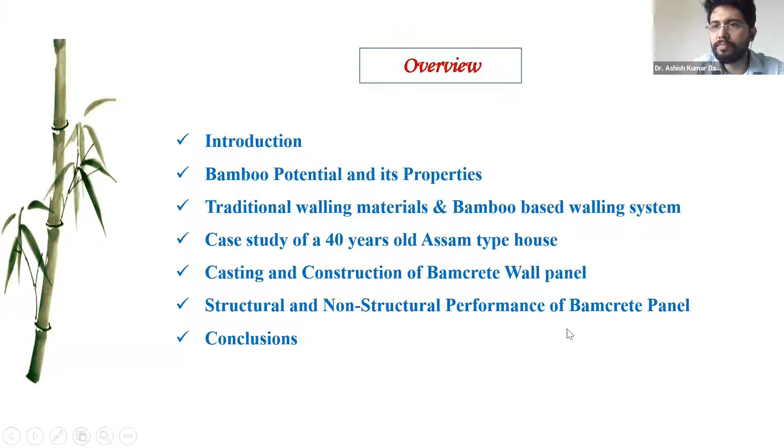So, the background of the work, I'll explain. The cement plaster bamboo-based wall is very common in Assam and various northeastern parts of India. However, this technology is rapidly getting obsolete. This research was initiated to establish scientific knowledge that can help in the acceptance of this technology.

As construction is one of the predominant sectors in developing countries like India, after agriculture, the wall takes up one of the important construction units and consumes a huge amount of raw materials. If I'll say the walling materials so far that we are using - burnt clay bricks, fly ash bricks, hollow concrete blocks, autoclave blocks - and many more lightweight drywall partition systems have come up.

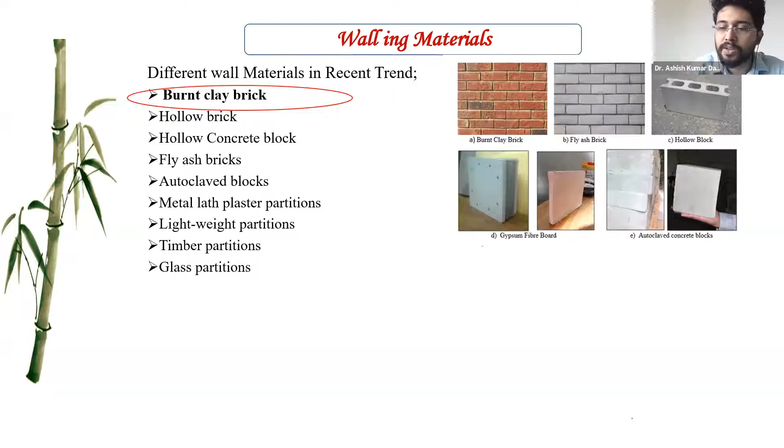But all these walling materials usually consume non-renewable resources. So out of different walling materials, still burnt clay brick is predominant and dominating over others, even though we know that burnt clay brick has different disadvantages. So we have to look into some sustainable alternatives, and in this prospect, we cannot keep aside bamboo.

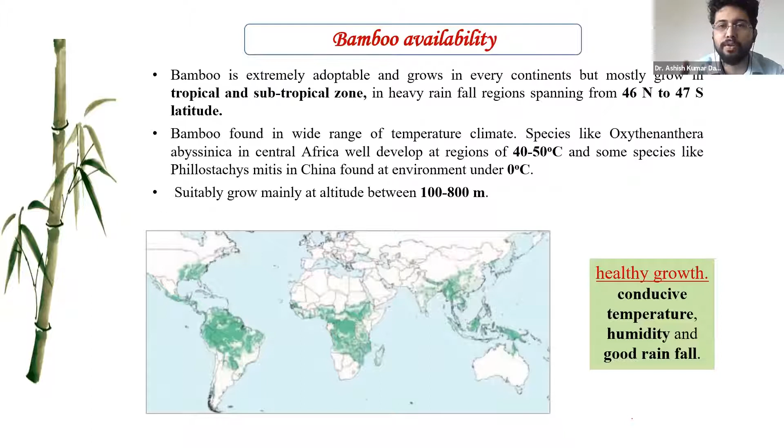As we know, it's a fast growing giant wood-like grass, coming in the family Gramineae. The availability of bamboo is widely available all across the globe, especially in the higher rainfall areas in tropical and subtropical zones. Even different bamboo species are available in very high temperature areas at 40 to 50 degrees, or even some species are found in very low temperature climatic conditions.

As for bamboo distribution, it is quite abundantly available - about 67% in Asia and Oceania, about 30% in the Americas, and the rest in Africa. Europe does not have any indigenous species, unfortunately.

So, bamboo distribution across India - about 12.8% of the country's forest area is covered with bamboo. About 66% of the growing stock is concentrated in the northeastern part of our country, and Mizoram is covered with about 57% of its total geographical area.

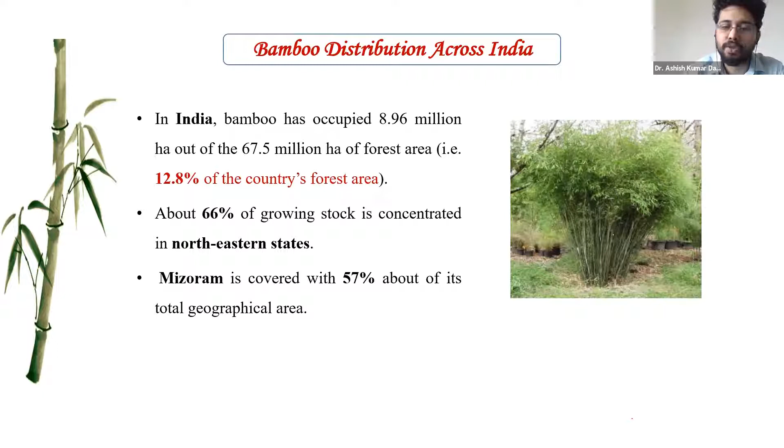If we'll see the features, bamboo is a culm segmented with solid joints called nodes. Between the nodes, the culm is called internode, and this culm wall thickness greatly influences bamboo's mechanical properties. It is very good in compressive test - we have found the value is even more than normal concrete, about the level of structural concrete - and also good in tensile and flexure.

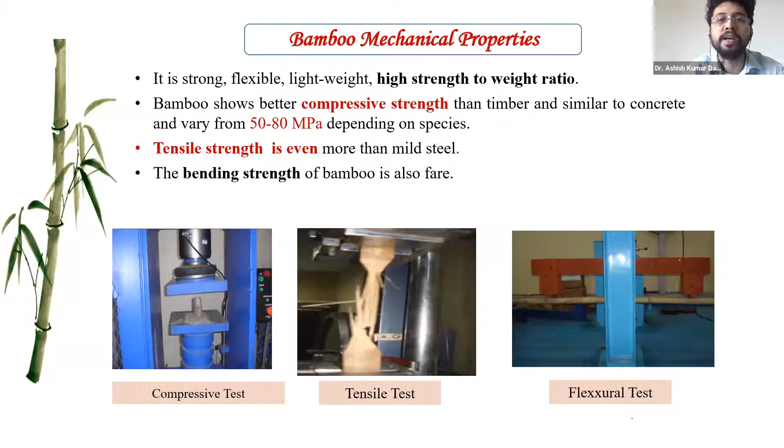Bamboo usage, especially in walling systems, has a recorded history since a long time. As per 2012 data, about 9% of the population live in grass, thatch, and bamboo walled houses in India, and about 65% in Arunachal and Assam live in bamboo walled houses.

Bamboo as a wall construction material is used all across the world because of its special properties like lower modulus of elasticity, good ductility, and pliability, hollow and lightweight, which makes it easy to form into strips for weaving purposes.

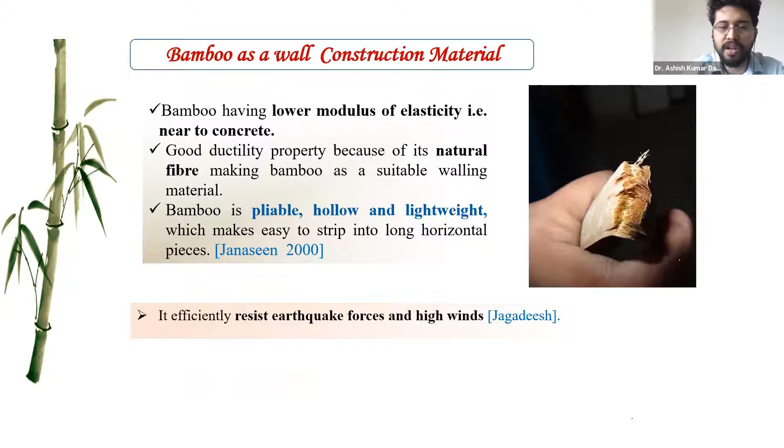If we'll see the bamboo-based walling system, it is broadly classified as permeable and semi-permeable. Technically, it's classified as plaster form and non-plaster form. Coming to the first, non-plaster form - there are different kinds of non-plaster bamboo systems and weaving patterns that have been developed traditionally.

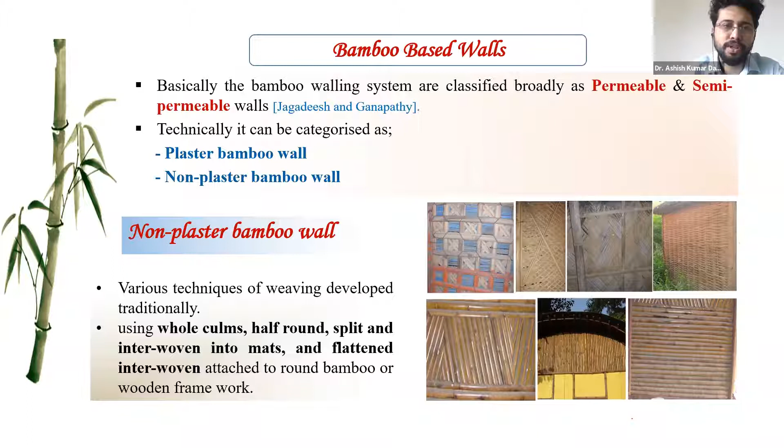So here it is one bamboo board which is used for the wall, and this is the chitra wall, which is mostly used in many parts of the world. The texture and everything depends on the skill of the artisan. And the prefabricated bamboo mat, which is the developed one - these are the prefabricated bamboo boards and composite mats.

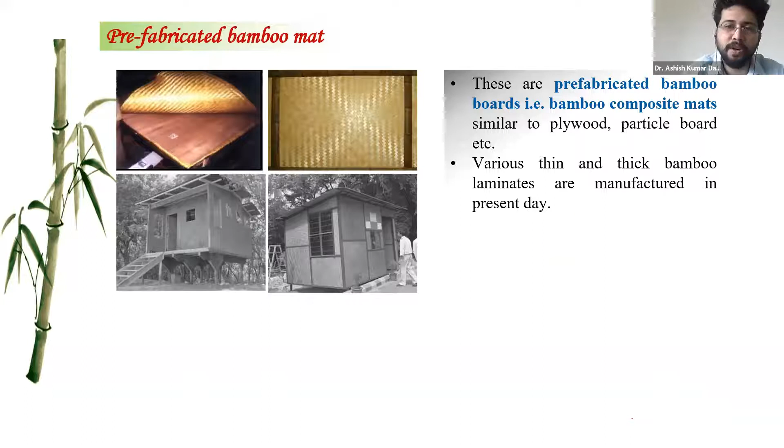Similar to plywood or particle board, these are mostly used, but it has been seen that unless it is protected by a long overhanging roof, away from ground contact, or painted regularly, this unplastered bamboo walling system deteriorates rapidly due to direct sunlight, weathering, and fungi or insect attack. In contrary to that, the plaster form of bamboo, which is an improved version of the bamboo walling system, makes the bamboo system better in strength and robustness, also providing insulation and protection against fire and weather.

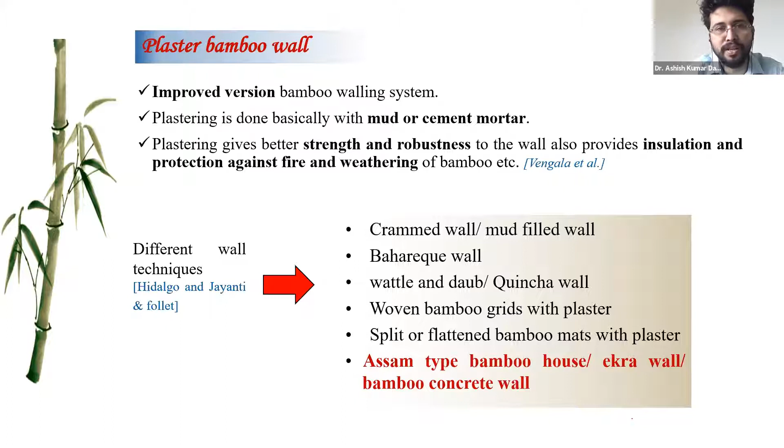So these are the different types - everybody should be aware of this plastering form of bamboo walling system, in the crammed wall system, which is practiced across the world in different ways. This is the mud filled system where the studs are placed and slats are attached, and the space is filled with clay.

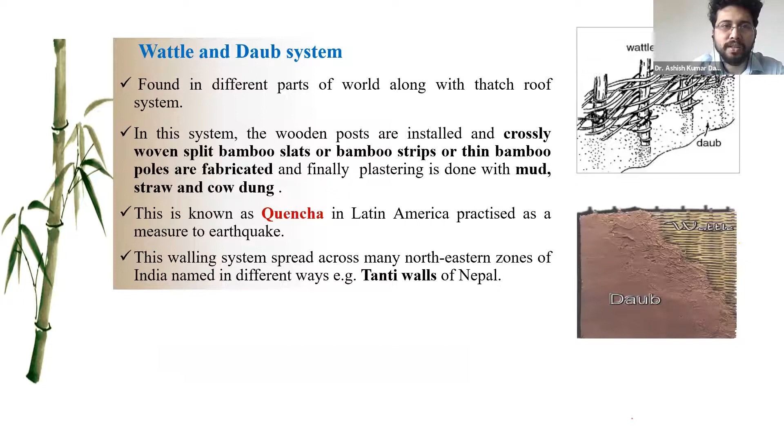This is the translation of the Bahareque system that we usually know. Then the wattle and daub system - this is the woven bamboo system, also known as quincha in Latin America. Then the bamboo grid system, derived from the Tanti wall, where steel wire mesh is covered and plastered using cement mortar.

So out of this, this is the developed form of the bamboo walling system in the plaster form, that's widely adopted in many northeastern parts of India.

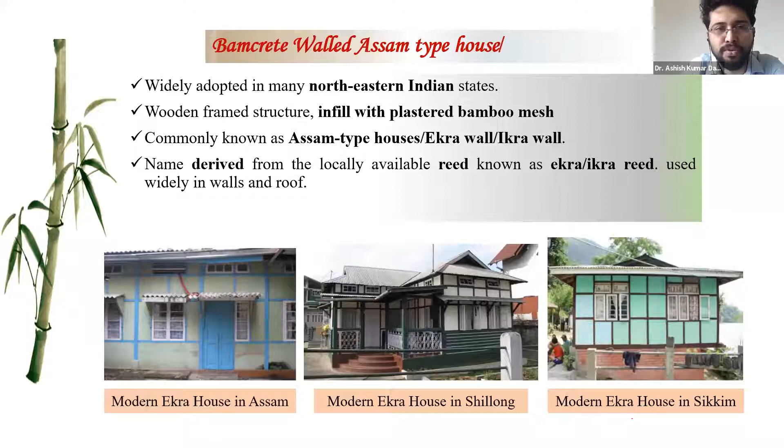This is the bamboo wall in the Assam type house, commonly known as Assam type house, and this walling system is known as Ekra wall, because it is Ekra reed which has been used for the construction of the walls and roofs. And from that, this name has come.

Usually in this building, the bottom part is a brick wall and the top part, above the window sill level, is constructed of the bamboo walling system. The development of this Ekra walling system - previously it was a wattle and daub system - this mud is replaced with cement plaster during the British colonial time.

This system is known as bamboo concrete, where the concrete layer from both sides is interconnected through the gaps of the woven bamboo strips. And this system has been practiced widely across the community, among different economical groups of people over time.

But unfortunately, this is in a phase of obsolescence, as modern construction is not paying attention to this. So for reviving this technology in a better and modern way, we started work on this, and a case study of an Assam house, a 40-year-old Assam house, was done.

This was a 40-year-old Assam house, which was dismantled in 2014. It was built in 1973. This is the supervisor's own house - he spent his childhood days there.

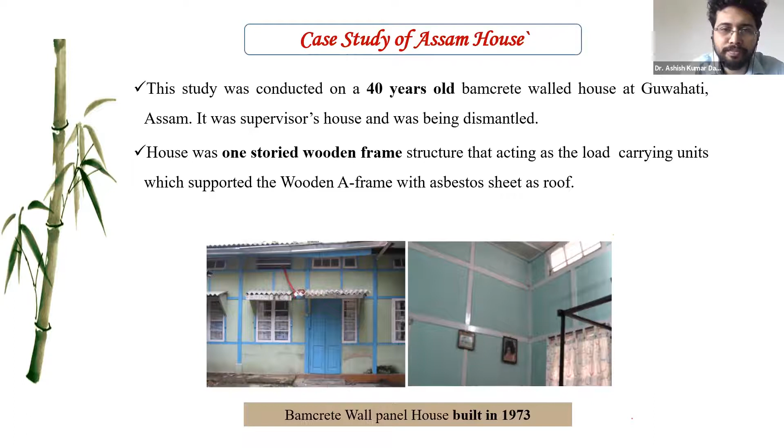As we note, in this kind of traditional system there is no concealed wiring, which is one of the flaws. Another flaw is the hanging of roofs, pictures, curtains, and everything - usually it is practiced from the battens. These wooden battens are the main load carrying member, and these partition infills are the bamboo walling system.

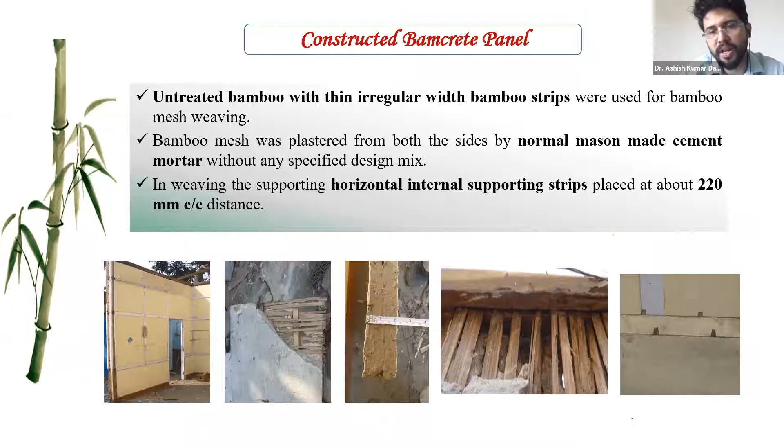So in this wall, I found that untreated bamboo with thin, irregular width bamboo strips were used. The mortar that was laid was the normal mason mortar, without adopting any design mix. The mortar used in the construction and casting of the bamboo system is the normal mason mortar.

As per the house owner, regarding durability, it has been understood that these panels had undergone no damage or any repair work in their lifetime of 40 years. There are no cracks or anything visible - only regularly it was painted, even though we know that Guwahati is in earthquake zone 5.

Even a devastating fire broke out in 1992 and burned down the colony, within 10 to 20 meters distance, completely - but nothing happened to this house. So we started different experimental scientific validation of this, as we know that a partition wall member suffers from different kinds of loading during its service and needs to satisfy different performance criteria, especially structural and non-structural both.

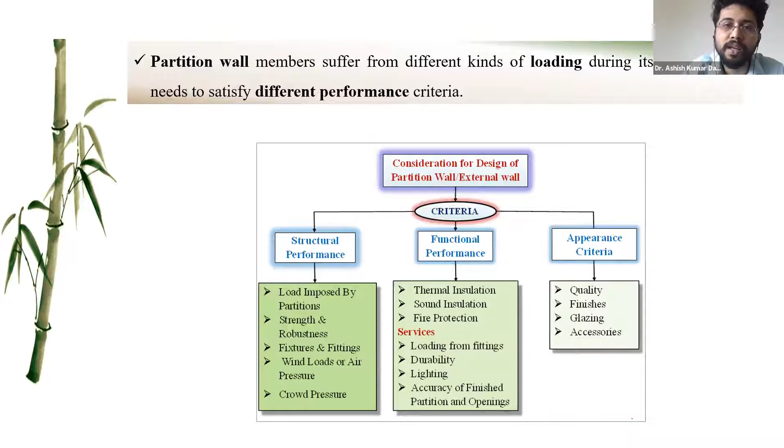So the impact test and the monotonic loading test, the static loading test usually, which we consider for the energy absorption capacity of this bamboo walling system. So both the vertical and horizontal impact testing with the hard body impact test. And we conducted the test on the existing 40 years old bamboo walled panels.

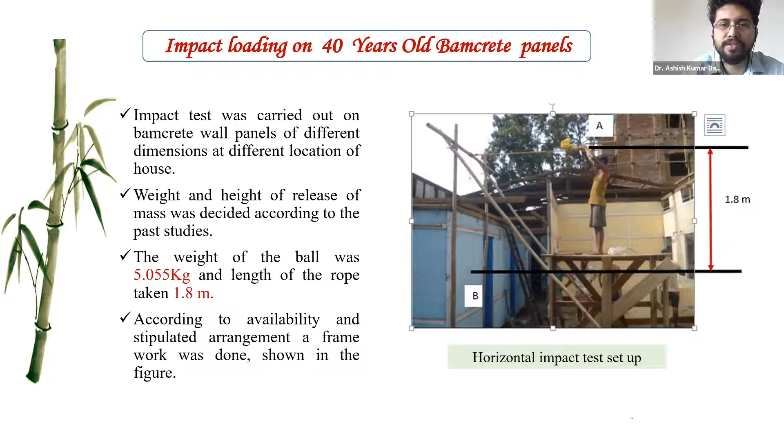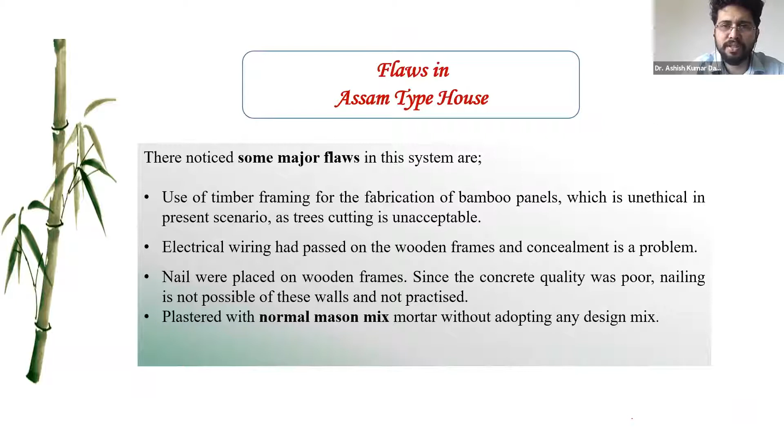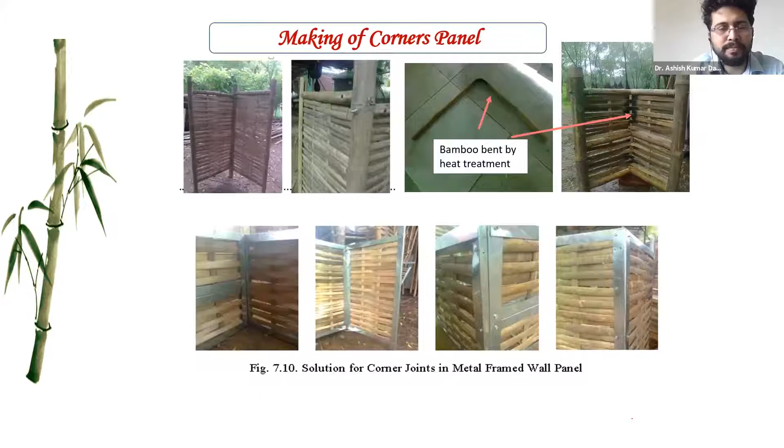After this test, we started work at the laboratory level in the preparation of the panels, both small and large size panels, where bamboo as a frame we first used, then the metallic framing with the twin leaf and the single leaf system, we started fabrication. After that, the techniques of making the corner panel. Then the casting work started. This casting was of different types. Firstly, we considered the normal mason mix casting.

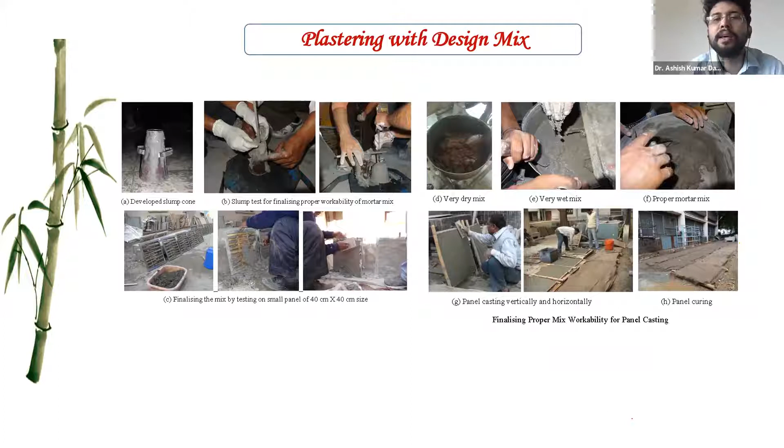Then the casting of the panels with the design mix of mortar. Using the design mix of mortar, we studied the rheology effect, and the casting process has also been undertaken in the casting of the bamboo panel. So the workability level, the admixture doses, and this work is now carrying forward everything, the viscosity and this. So these are the different water cement ratios we considered, from 0.4 up to 0.7, and casting of the panels was conducted. In the process of casting, besides manual casting, now we consider the machine-based plastering process.

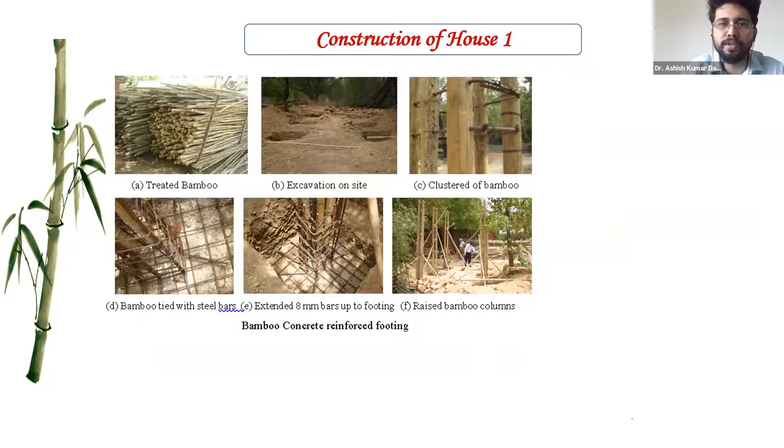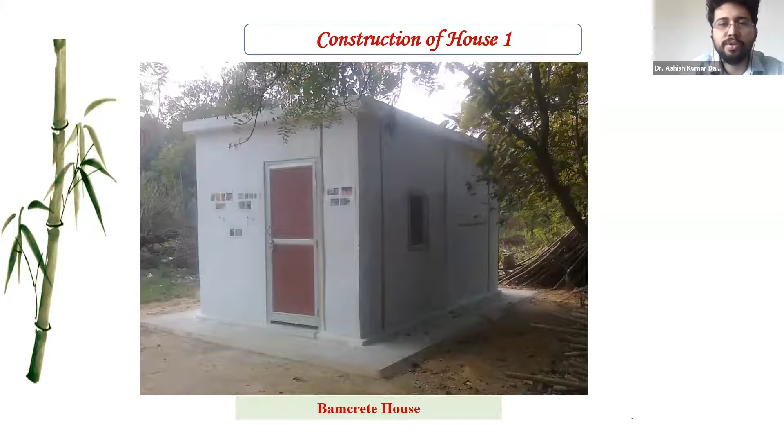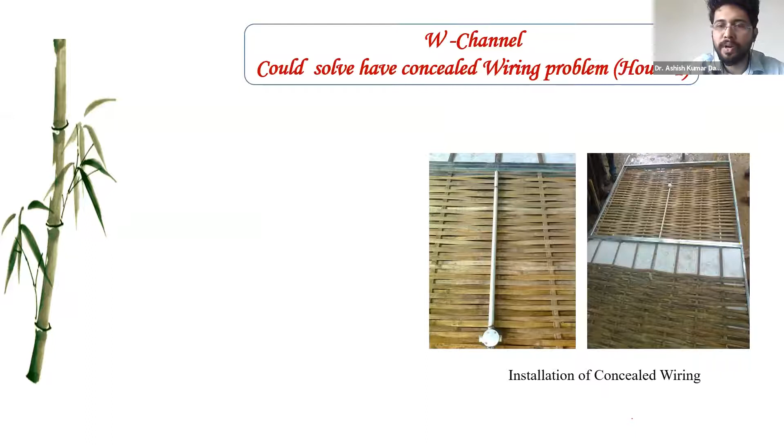So in the twin leaf system, we solved the problem of concealed electric wiring, which is quite difficult in the case of the normal traditional Assam type house. So to take this technology forward, we used this twin leaf system with the wiring passing through it. And this is the house that I have already shown. And also nail insertion, which is a problem in the case of normal mortar mix. But the design mix mortar has enough strength to carry the nail insertion, and we studied everything. Then predetermined insertion of the plate in the W channel we also studied for anchorage purposes.

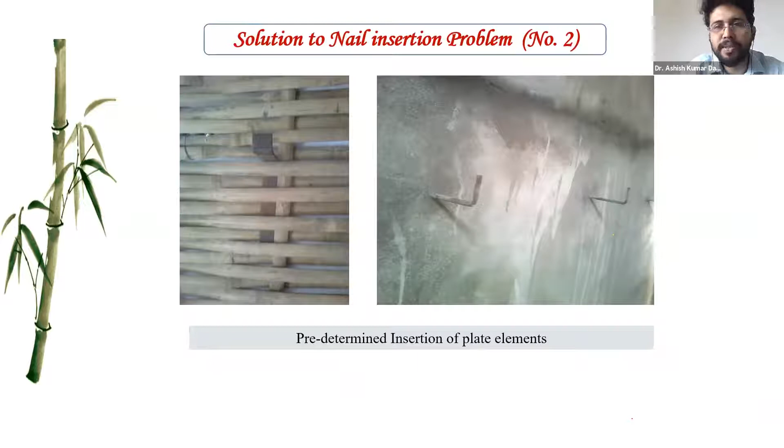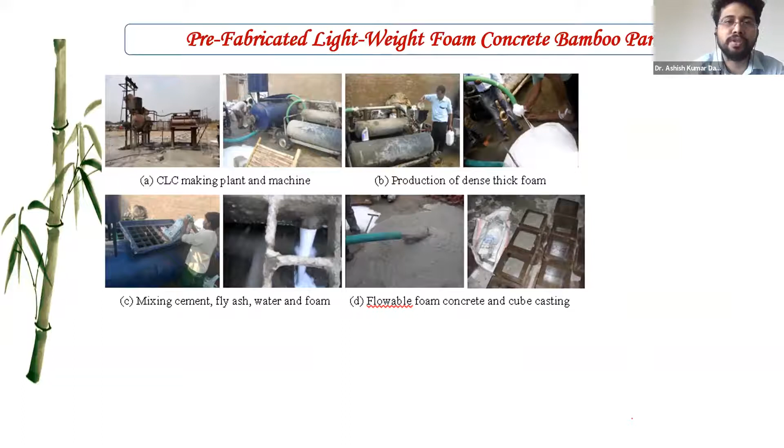Then different parametric studies in the fabrication process, with the number of vertical supporting strips, with non-skinned and skinned strip weaving. Then the effect of the width of the strips on the panel strength. These are the different parametric studies, also using different materials such as flowable foam concrete, which we used to make the panel lighter. It has also been studied. And you can see in this picture, both single and twin mesh panels were cast using the flowable lightweight concrete. Other materials we also cast to study other material systems with the bamboo walling system.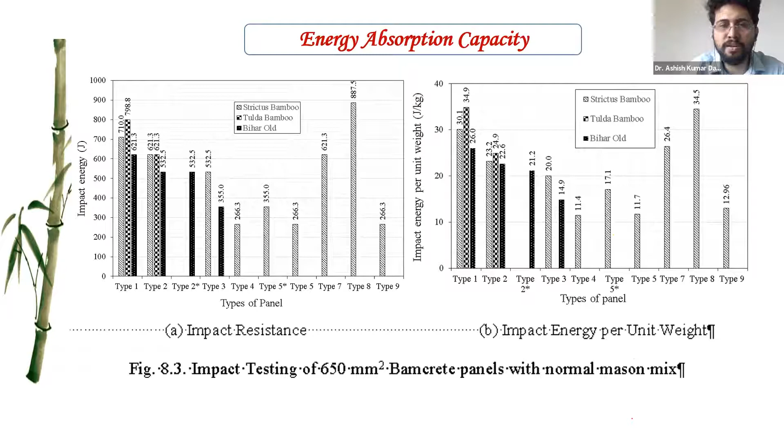So it signifies that usually the traditional process of bamcrete panel casting in Assam type house follows the normal mason mix mortar. You can see this is the horizontal impact testing also conducted, and we found the level of the strength is quite similar to whatever we found in the case studies of the 40 years old house. So it is concluded that they have been using this normal mason mix. So after that we started work on design mix.

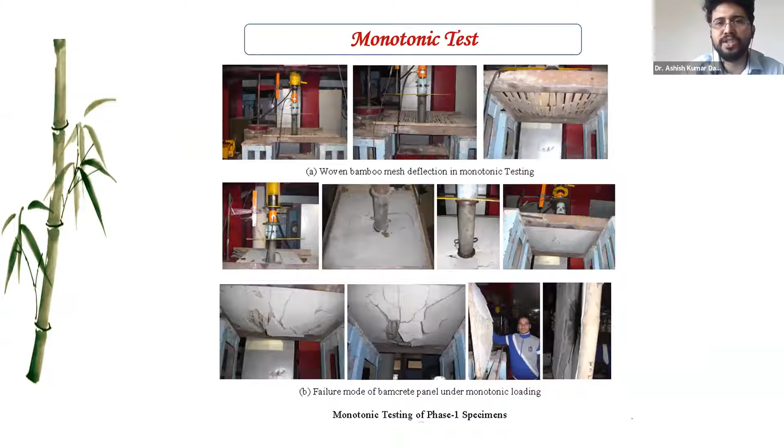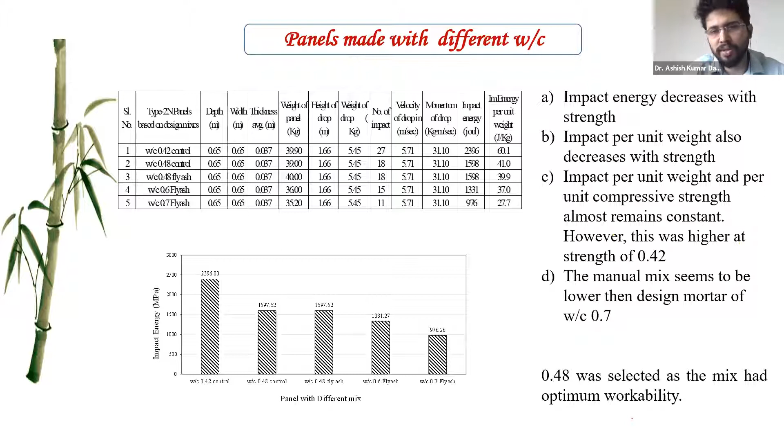And as we know, water to cement ratio at 0.42 was showing the maximum impact energy absorption. Similarly, you can see over here, the strength of the panel got increased, and the energy absorption capacity in the monotonic loading is high when the design mix mortar was used. And surprisingly, at 0.7 water to cement ratio also, it was found more energy in the impact energy compared to the normal mason mix mortars. So we can conclude from here that this normal mason mix mortar is quite inferior even than 0.7 water to cement ratio.

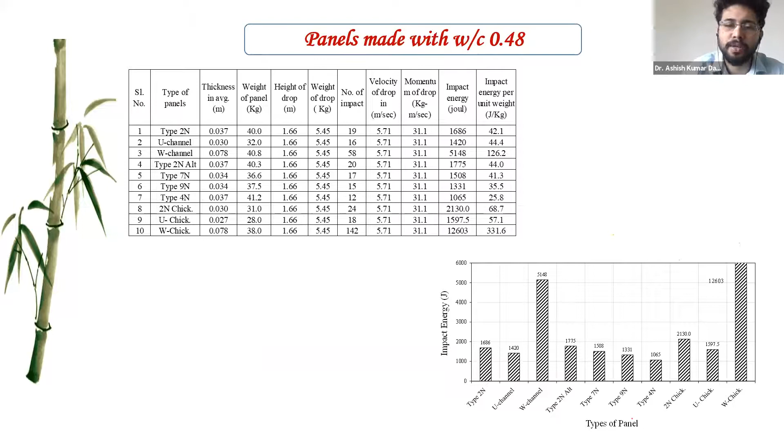So after that, we especially chose the 0.48 water cement ratio, and different panels were cast. Their results are these monotonic loading results. And it was found that these twin bamboo mesh panels were very much high, you can see it was about 12,603 joule of impact energy absorption of the twin mesh system compared to the single mesh concrete walling system.

But in the monotonic loading, the twin mesh system showed very lower level of energy compared to the single concrete panel mesh system, because of the mortar which is not interconnected from one side to another side. This might be the reason for this. So after that, based on the momentum, different lightweight and heavyweight panels we studied and compared with the bamcrete panel system.

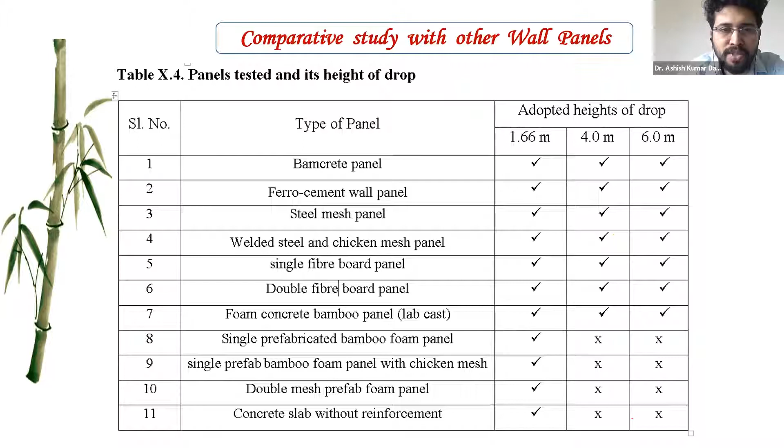So this is the steel mesh panel system, welded steel with chicken mesh, then dry wall system, single fiberboard, double fiberboard panel system. Everything was conducted with different momentum, with different heights. And this is the drop bar testing. This is the result we got.

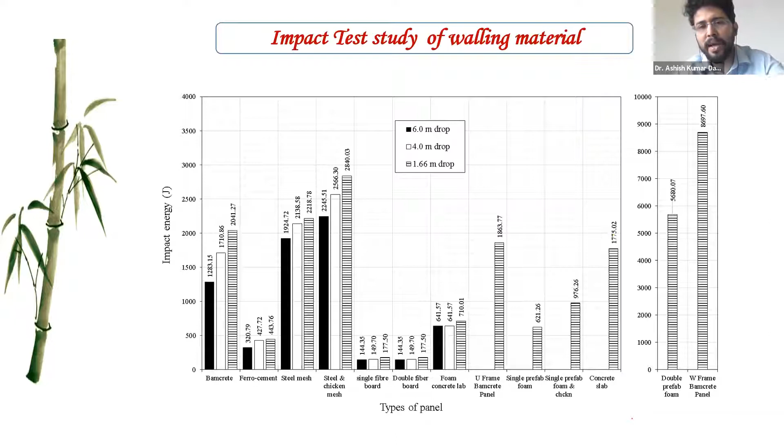And we found that the bamcrete walling system is quite in the level of the steel and different heavyweight walling systems. The width of the panel definitely is a governing criteria, taking care of the strength and robustness of the panel, and it is quite comparable with the heavyweight walling panel system, just like the steel wire mesh or the welded steel mesh panel. We found the strength is quite comparable.

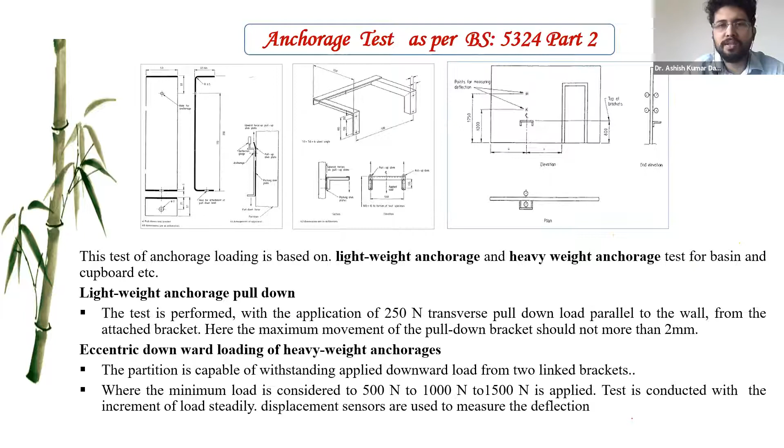So after this test, also anchorage test we conducted. Anchorage test is very important, as the lightweight anchorage pull down test and the heavyweight anchorage pull down test. That is the basin test. So we conducted the test to find out the eccentric loading strength of the bamcrete panel system. And this is the pattern we found.

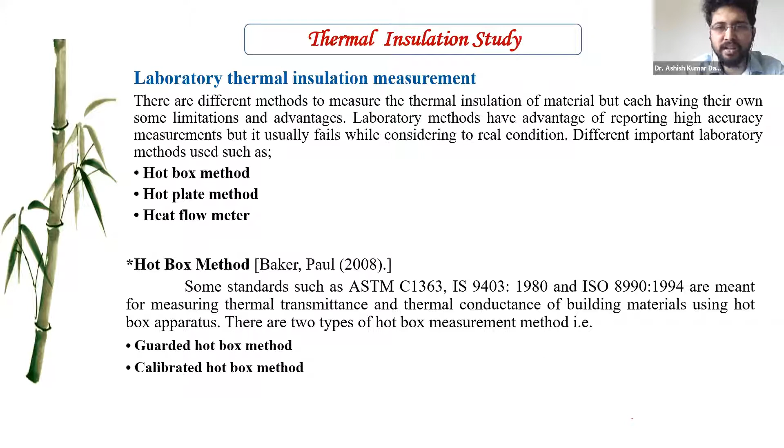So as we know, there are different hot box, hot plate, heat flow meter tests, or laboratory thermal insulation measurements using different standards. In this method, we followed the field thermal insulation measurement. In the field thermal insulation measurement, usually we used the heat flux method to find the thermal transmittance, the conductance of this concrete walling system.

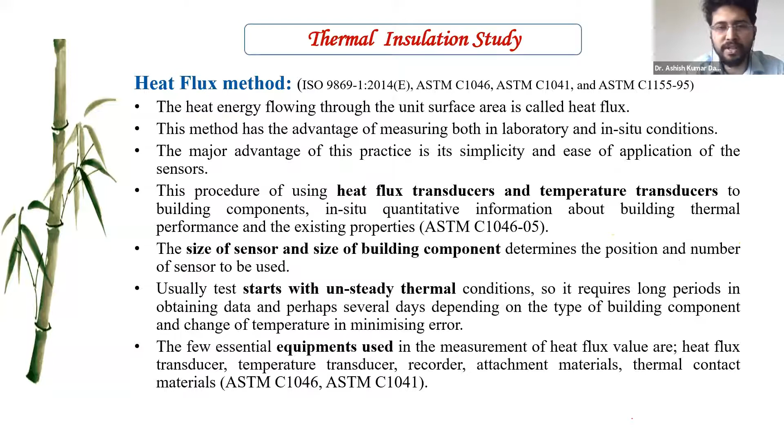So as per the ASTM C1046, we used the heat flux transducer on both sides of the panel, and thermocouple temperature transducers also we used to record the variation of the temperature data. So this is the heat flux method where we used ISO 9869, and this is the laboratory setup for the thermal insulation study of the concrete walling system.

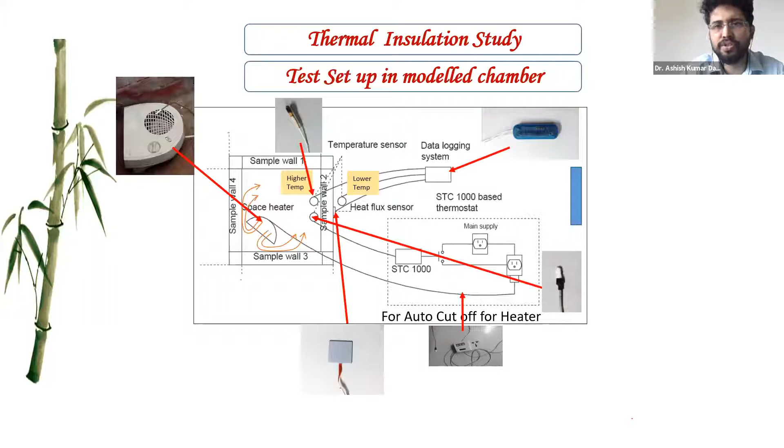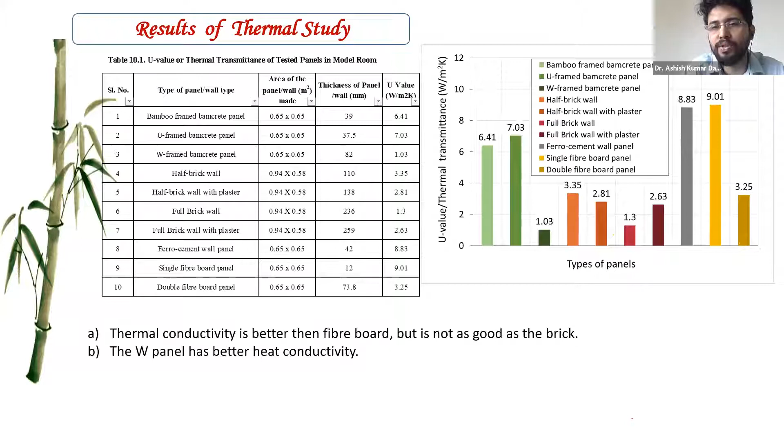And this is the different U value, that is the watt per meter square Kelvin, the thermal transmittance value. And the concrete walling system is quite comparable with others, and it is in the range of the fly ash bricks, which are presently used. No doubt the burnt clay bricks have very less U value. But the twin leaf system of the concrete walling system has very good thermal insulating properties because of the gap that exists between the two meshing systems.

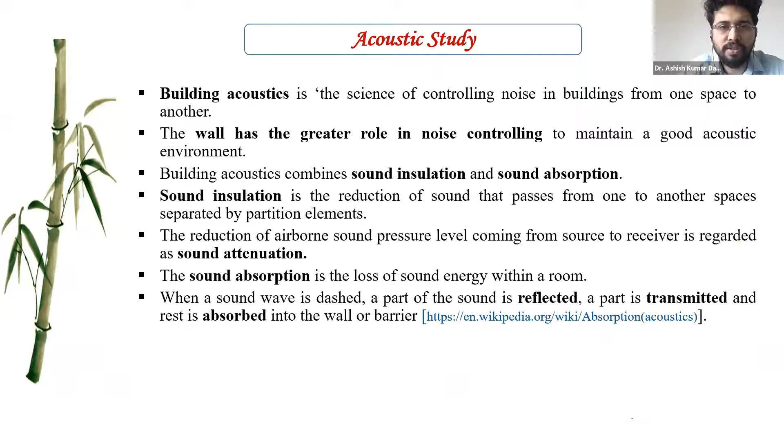So after that, the acoustic insulation study also I conducted on this walling system, and also compared with the brick wall system. And as we know, sound attenuation or insulation is the reduction of the airborne sound pressure level coming from the source to receiver, which is very important for this wall system. So this acoustic insulation study was conducted to find out the sound transmission class. The more the sound transmission class of the material is, the better is the insulation effect.

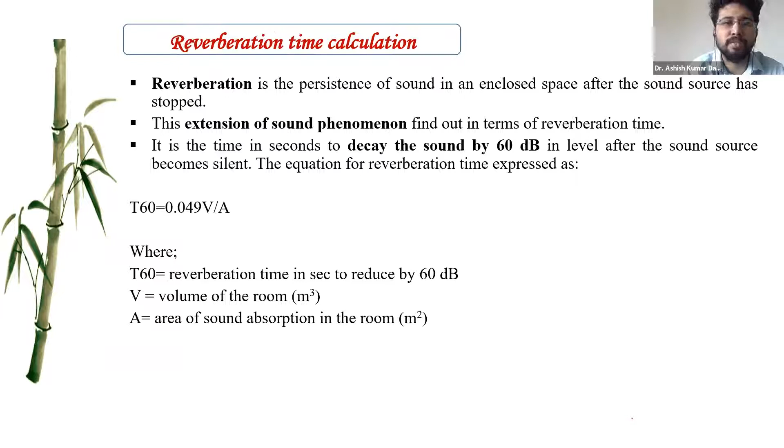So as per the ASTM standard E413, we conducted the test for finding the single rating number, that is the STC. And this is the reverberation time calculation. As we know, reverberation time is the time for the decay of the sound by 60 decibels in level after the sound source becomes silent. So we also prepared the chamber of the concrete walls, both twin leaf system and single leaf system, to study the acoustic insulation.

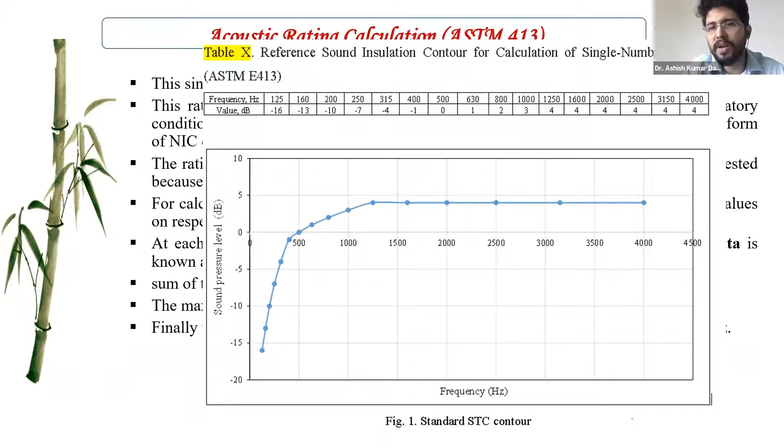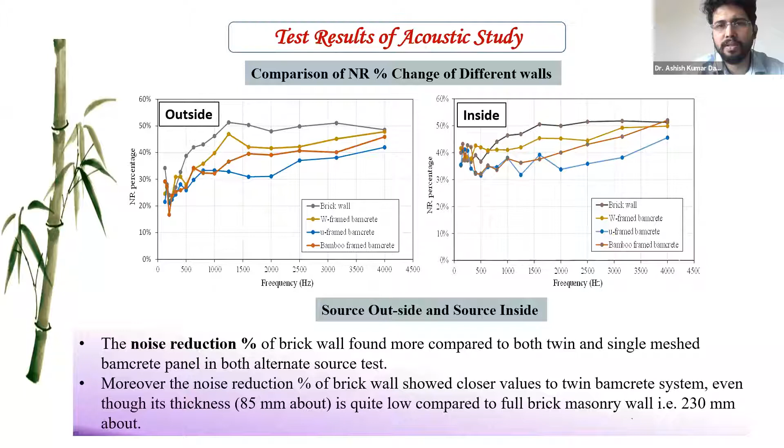You can see that the brick wall has good noise reduction data. After that, the twin system. The single bamcrete walling system didn't do as well as the double leaf system, but the double leaf system of bamcrete walling is quite close to the brick wall system. Although this brick wall was a full brick wall system. This is the noise isolation class of the material, the NIC value that we got for the W framed bamcrete walling partition.

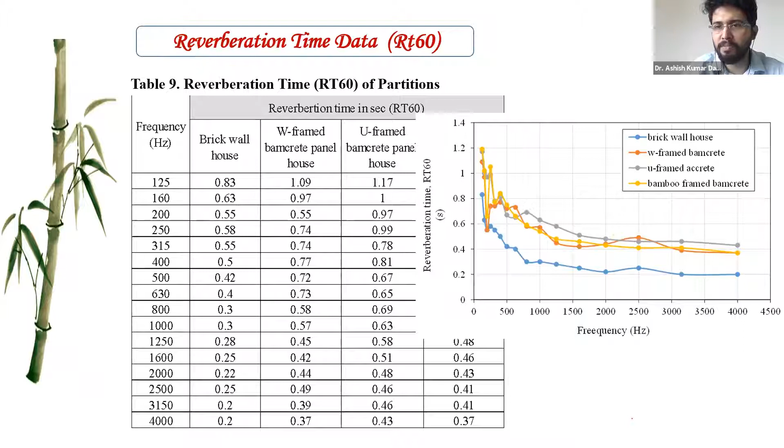This is the reverberation time data. You can see that the reverberation time is very less in case of the brick wall system compared to the bamcrete walling system. So this is the STC test, and this is the STC data. And from this graph, you can see that the STC of the brick is coming low compared to the W frame, that is the twin mesh system bamcrete panel, and it is quite comparable with the U framed and bamboo framed single mesh bamcrete panel system.

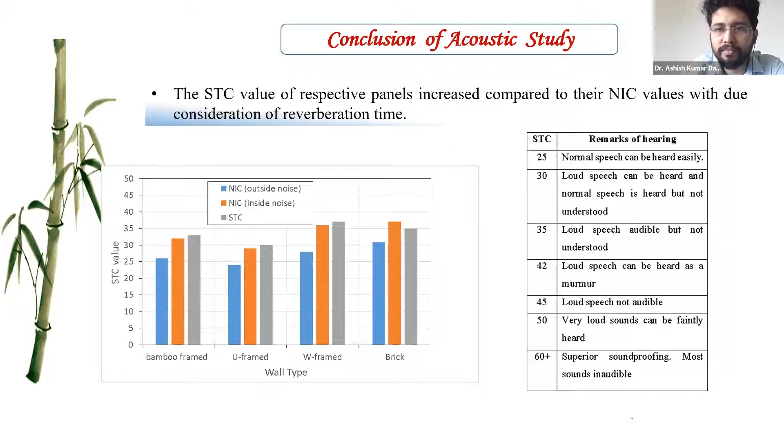And this is the conclusion that I want to highlight over here: it was realized that bamboo strips are woven with small gaps in between, so the mortar on both sides gets interconnected, making the system more robust and durable. Plastering the bamboo wall makes it more durable. When plastered, the moisture content gets reduced to a significant level, which makes it difficult for termites to survive.

As we saw, the 40 years old Assam type house was without any deterioration of the inside bamboo; it was still lasting inside the plaster, even though non-treated bamboo was used, along with a normal mason mix, it could last for 40 years. It was quite intact at the time of testing.

So the twin mesh system improves the impact energy to a great extent, as we saw in the impact energy test, but the energy absorption with static loading, especially monotonic loading, was a bit less, even less than the single mesh bamcrete panel system, because of the lack of interconnected mortar from both sides of the woven bamboo strips. The mix design of mortar over the traditional mason mix improves the energy absorption capacity and characteristics of the bamcrete panel construction. Thank you.

Font has been changed. Sorry for that. So the problem is, I'll continue with my presentation over here. So together. Okay.

So, rethinking of bamboo in mainstream. There are certain challenges to use this material, as this material is used in several other countries and even in India also. There are certain challenges for the available resources, such as extensive studies, and ready resources are not available. Let's say the compressive strength and other details are available, but for the joinery, how we can design the joints and stuff like that, that is not available. So that is the challenge. And so it requires extensive study to perform the structural health overall.

And there is a possibility that we cannot use bamboo as a single material. There should be possible ways to integrate it with other materials, and those are the possible usages of bamboo. Of course, we have to get it peer reviewed, and it will require collaboration with academic institutes, so that awareness and exploration of its capacity and potential use can be expanded, and we can see what the future opportunities are using this material.

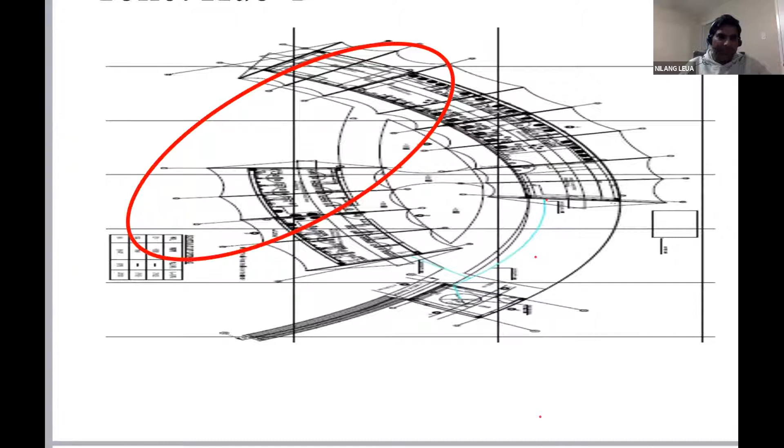There are a couple of other elements, but they are not bamboo; they are based on the requirement of the project, like retaining walls and other structures. Next slide, please. This is the architecture layout for the toilet hub 1. Next slide, please. Just highlighting the elements for the bamboo toilet hub 1. Next slide, please.

Roof. I don't know why... presentation. Everything is stretched at your end. Mine is completely good. Let me try my screen sharing because it doesn't look good. Can I share my screen? I am reading from my presentation, and when I look at your presentation, it's completely different. It's very stretchy. Still the same error I am getting. I think we have some time. Probably you could log out and log in. Yeah, I'm just sharing from my other PC, so just give me a minute. It will be resolved. I'll also share the PDF copy. I think that will be better, because it's not syncing with the communication.

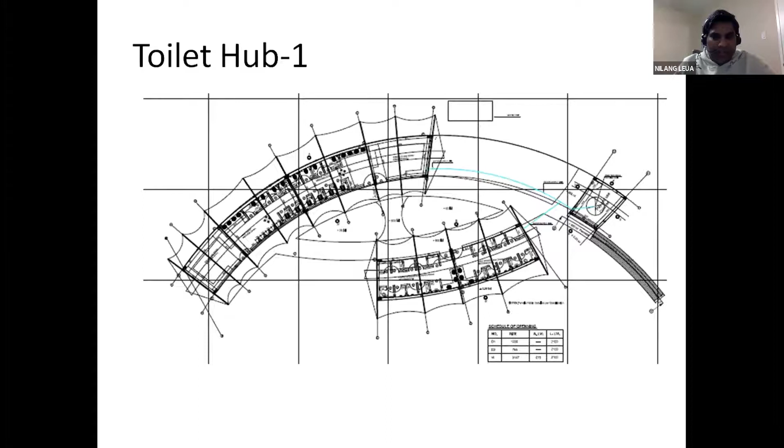As we discussed, there are a couple of elements in this first project. This is the toilet hub one. This is the architecture layout drawing, and there are a couple of small elements. Next slide, please. This is the plan area of the structures. They are staggered. This is the first one. Next slide, please. The second, a small one. Third one. Next slide, please. And this is the roof layout, which is made of bamboo. Next slide, please.

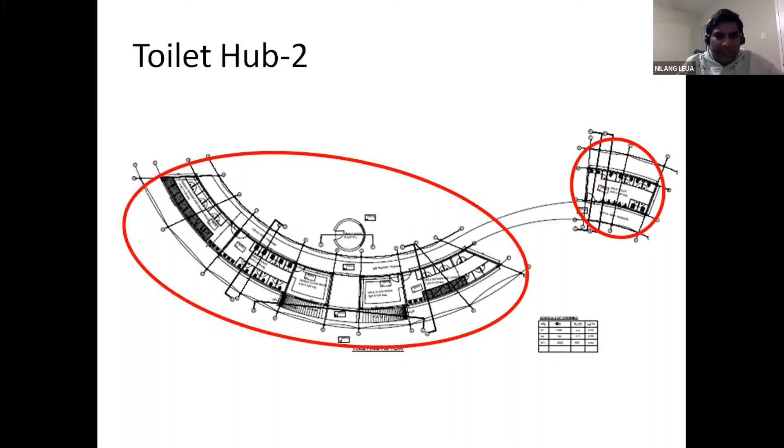Here's the toilet hub 2, situated at the same site but at a different location, and its geometry is different. Next slide, please. This is the ongoing situation of the bamboo structure. The roof is made of bamboo, and it will be a curved roof. First of all, we didn't want to make the geometry complicated. Based on the requirement from the architect, we discussed many options for the bamboo, because if we go for straight elements combined with horizontals, it creates a problem for the joinery. So we went for the curved roof, and the frames are spaced at about 6 to 7 meter spacing.

Next slide, please. These are the other site photos. Next slide. Next slide.

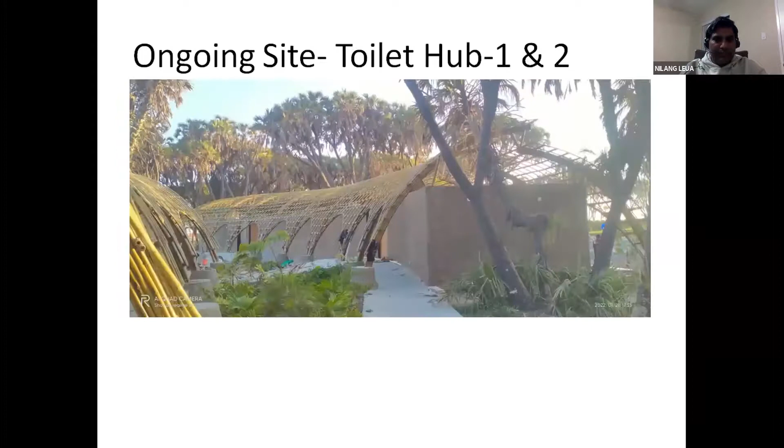Detailing of the foundation: here we have the situation of possible scouring at the base, and there will be possible settlement of the structure. So we consider this scouring depth, and as the structure has lateral force due to wind, there will be uplift of the structure.

So we check the foundation with all the potential gravity load of the masonry wall, and we consider the strip footing because it has potential settlement. Individual footing would be a problem, so we consulted with the geotechnical consultant. Based on that data, we provided this strip footing, as this is not a heavy high-rise structure but a very lightweight structure for this footing's intended use. So we go for the strip footing.

Next slide, please. These are the structural details for the foundation, and there are two different options. One of the locations where we are getting soft rock, we have to integrate with the foundation because there are possible chances of sliding due to the smooth surface.

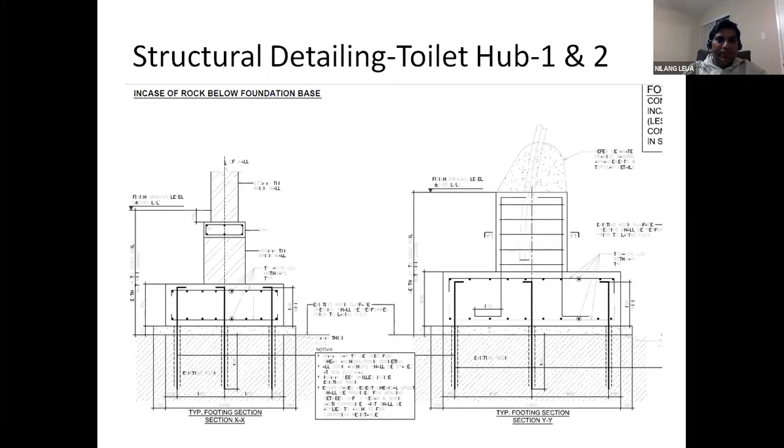Next slide, please. There are some details out there, I'll show you.

While this structure was under construction, we had some problems. In 2021, the structure was initially designed for 60 meters per second wind speed, but we experienced 200 to 250 kilometers per hour wind speed, lasting 9 to 12 hours, hitting directly this coastal area, starting from Diu itself.

There were so many damages over that region. It was a very difficult situation because the site was under construction, and some roofs of these particular structures collapsed a little bit. So we tried to provide remedies, and we also measured what had happened to other structures. There were so many damages that occurred at this southwestern coastal area.

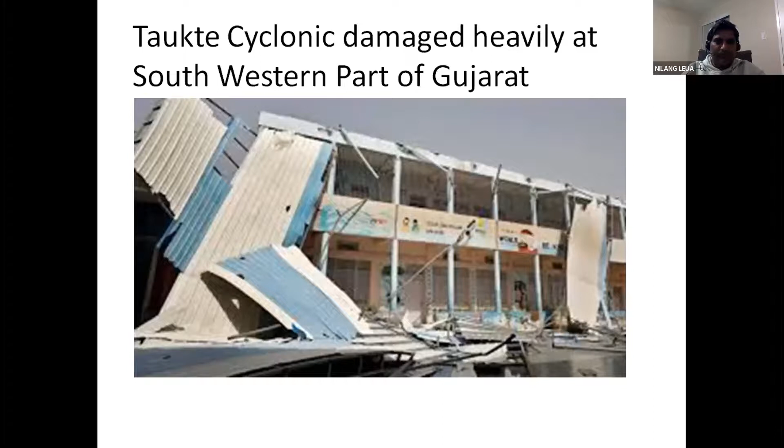Next slide, please. If you look at this picture, near this region there is some damage out there. For the intensity, there is so much information available, so I don't want to go into that—this is just one image that I placed.

Next slide, please. For the remedies, as I introduced earlier, bamboo can be used as an independent material, and we use curve geometry that is best for smoothly transferring the force, for domes and structures like that. It's very easy to control the thickness.

But here we had a situation of very high intensive wind pressure, lasting for many hours, and it is possible that this will hit every year. So we have proposed some modifications.

We haven't modified the structure a lot. We introduced cables at every frame and also provided bracing over the roof. So all the cables are not under huge tension—it's just localized pre-tension, allowing about 10 millimeters of deflection. Whenever wind hits the structure, the cable will engage with the structure, and it has already been engaged.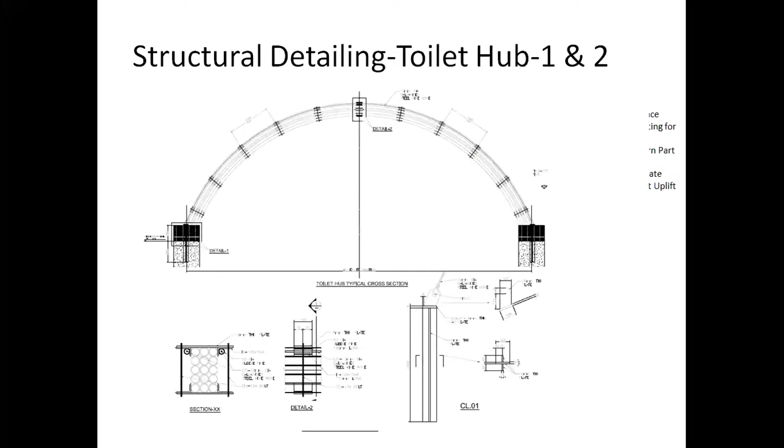Can you go to the next slide please? Yeah, this is the cross section detail, and we provided cables at the backside of the arch.

Next slide, please. Sorry, go back to the previous one.

If you look at this particular arch, we provided angles and small framing, and also a localized pipe welded with the angle. We haven't added more pressure over the existing bamboo, because additional pressure would cause bearing issues over there. At 1200 spacing, we provided this detail, and we ran the cable from one end to the other end.

We modified the existing RCC pedestal to integrate with the entire system, and we introduced a plus-shaped shear key that will come into action when any uplift of the structure occurs.

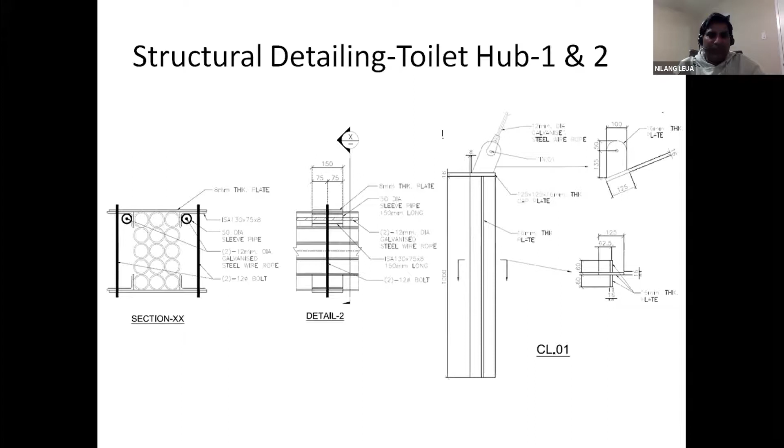We found we cannot directly provide a hole into the existing column and run this detailing. So we provided additional concrete to integrate with the structure, along with some rebarring. We also checked for shear friction for the additional reinforcement to integrate with the structure.

There are other structures, food stalls, that I talked about earlier. That is 3.6 meter by 3.6 meter in plan view. The initial idea was to have a cantilever structure, and as a structural engineer I resisted that. But the project was already in motion and some elements had been cast, so the structure was designed as all 4 points supported.

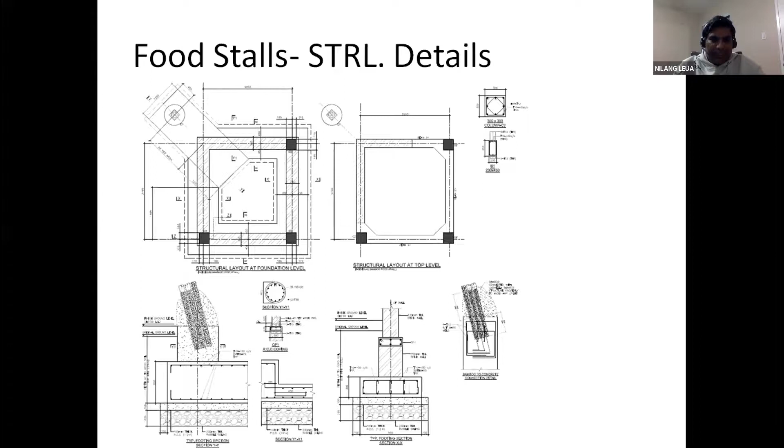There are some options where dual food stalls were present.

This is the detail for the upper part, where we provided support at the peripheral edge of the wall of the food stall.

This is the modification detail that we performed. We provided rebaring over the grade slab, small corner columns were initiated there, and we provided a bamboo support at this particular hatched portion.

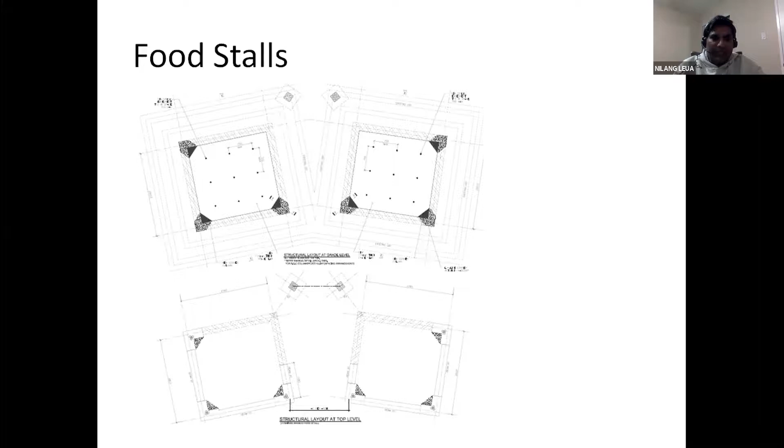This is the detailing for bamboo to be integrated with the system.

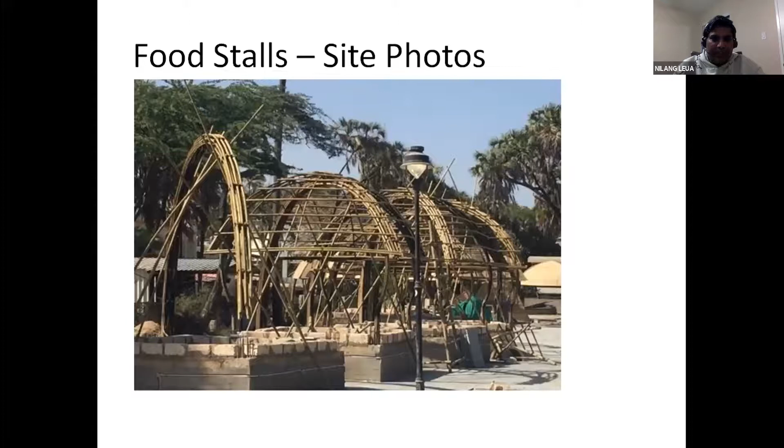This is the ongoing activity over the site. This is an earlier picture from when the site work was in progress.

This is a closer look after the finishing. You can see a number of columns that we added there.

While this incident happened, there was no damage to any of the structures, except one tree fell down over a structure and caused damage.

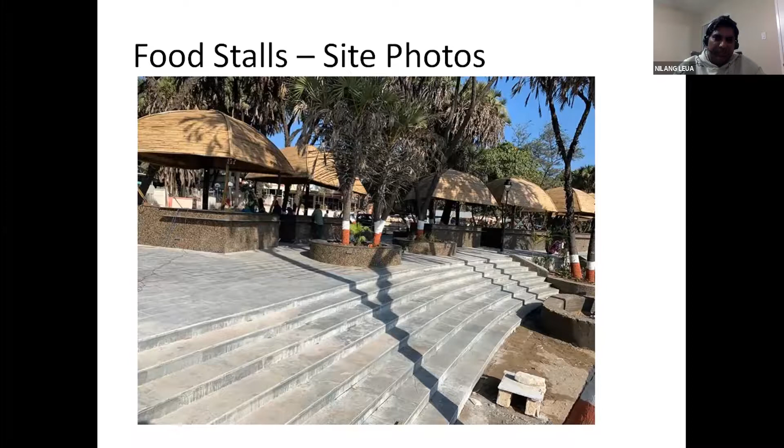These are some additional views.

There is another project we have done that is also ongoing - the Ghoghla Beach development. It is the same situation where the cyclone had hit. There are a couple of elements: a watchtower, an entrance, and some very small elements like a spiral entry. There was also an amphitheater structure we designed, but that was cancelled, so I haven't included it in this presentation - it's not present here. The watchtower size is about 9 meter by 40 meter.

Sorry, I think that's wrong - it's about only 4 meter by 4 meter circular diameter, and about 6 to 8 meter height. It comprises a dome over the roof and has a platform.

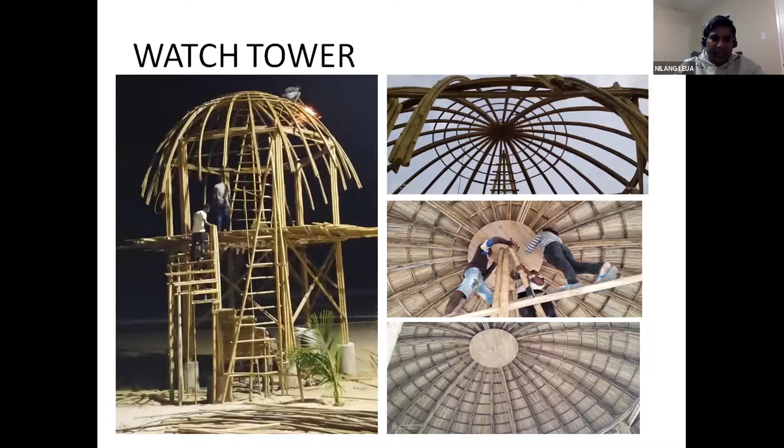It's just a watchtower where people can come in and feel the sea side. At the dome, there will be force over the ring, so we initially intended to use a structural steel ring. But unfortunately there was some pressure from the requirements, so we had to use bamboo as the structural element.

So what we did was use bamboo for the dome - one frame starts from one support to the other support, and all the other frames come together, filled with bamboo elements. We provided a diaphragm plate and a shear plate so all forces can equalize out together and be transferred together.

This is the platform entirely made of bamboo, and all the elements have been checked based on the geometry created in the structural model, with compressive strength analysis and guidelines available in the code we followed. We also tested some specimens for compressive strength and took specimens for tensile testing.

This is the outside view of the watchtower. Everything is based on using bamboo elements.

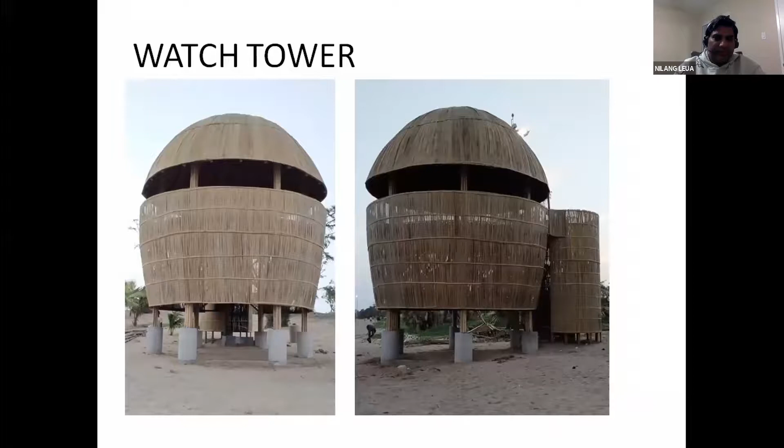At the entrance, there are some ladders. This is not a very big structure, just ladders, everything made from bamboo, supported over the RCC beam and column, and the RCC foundation. We have checked the torsion and everything. This is a very light load.

One other interesting project we performed is near Bharuch, a Riverfront Meditation Hall, about 50 feet wide span and 120 feet long span. So initially, whenever the structure comes, we compare with the existing material and existing technique, and integrate with bamboo and its capacity.

Initially we check with other materials - let's say if it is made of structural steel, then what will be the behavior? If it will be based on wood, then what will be the behavior? Based on that, we found there are possibilities with bamboo, but in that case we have to be conscious about the structural system. This is a 3D isometric rendered model view of that particular structure.

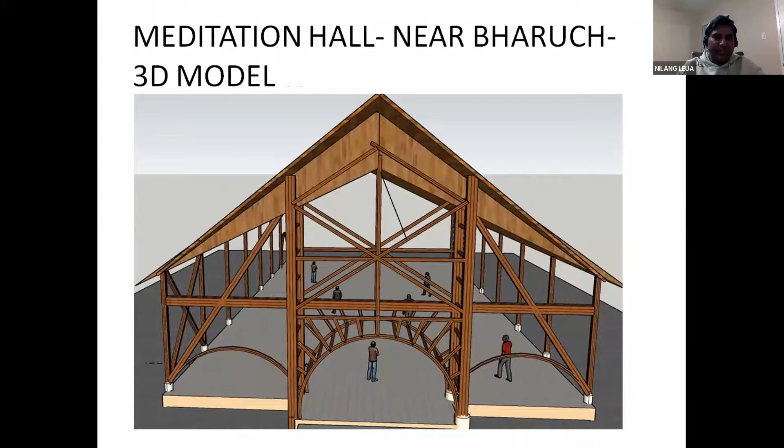While modeling the structure, initially we thought to have bamboo elements as a cluster for the main rafter member and column, but it came out very heavy and made the structure very heavy. Even the joinery at the beam-column junction doesn't allow rotation, because adding additional joints creates stiffness loss and problems. So what we did was introduce bracing to ease out the system, so deflection was controlled, force transfer was smooth, and the entire system carried very light loading.

Initially we thought we could make a common connection, but that's not possible - the connection doesn't allow it. In that case we have to use a structural plate, and how to integrate the plate with this bamboo element is itself another challenge, requiring an extensive study. There would be non-linear behavior between the two materials, because bamboo itself has nodes and there are issues with the material.

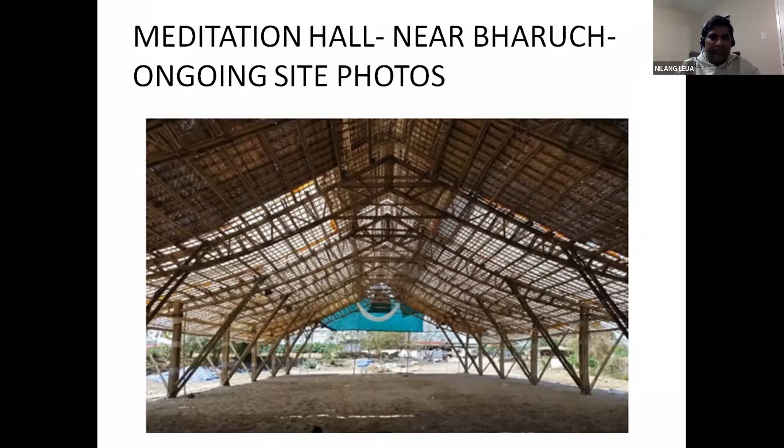When we introduced the bracing and took out the forces from the system, it came out very well. We checked the deflection on site, and everything was completed on site. These are other pictures of the same site.

This is a project we just now started working on. One architect came to us needing to go for parametric design. They gave a sketch and 3D view, and we started discussing how we could do that, and whether there was any possibility. Based on this initial discussion, we started working on it and provided a solution for how to work with the system.

This is the basic model based on what we got from the architect, and then we collaborated with the architect on what solutions we could make.

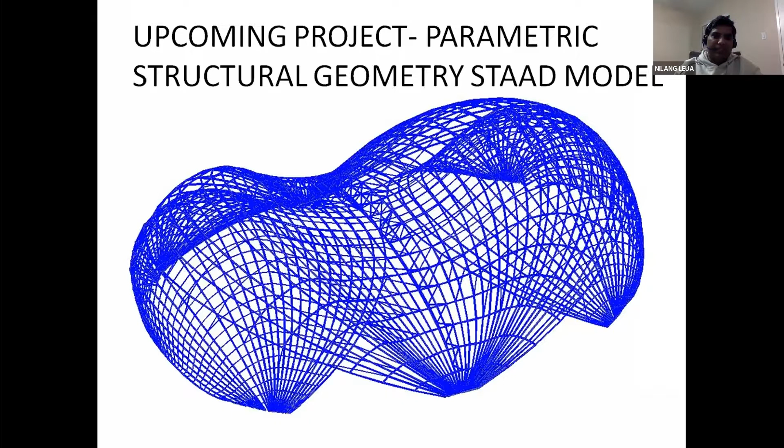We discussed with the architect the possibility of going for structural analysis - structural engineering starts from whole to part and part to whole, for example FE analysis or stiffness matrix analysis, even transferring load from the superstructure to the foundation. So we discretize the structures into different framing.

We gave options to go for several framing systems added to the trusses, using color gradation to show the framing system, though there will be some problems with integration into the system, so we are working on it. This is the first cut option we provided, and the roof height may need to increase because we're still determining which truss will be the lower one and which will be the upper one.

And we have initiated the discussion. Then we tried to figure out the situation, and there is the possibility that we can go for a cluster of the bamboo elements together instead of the trusses. So that is everything that we are performing over here. Next slide, please.

This is the system. This is the initial system that we are creating, and we are also collaborating with institutes. We already have talked with several institutes in Gujarat, and they are going to support us for this particular project for the peer review. We are also willing not only to make the model. As I already mentioned in the earlier presentation, we don't have to just use sophisticated software and make the model. We have to validate that particular structure by making a small prototype structure, and we are interested to move ahead.

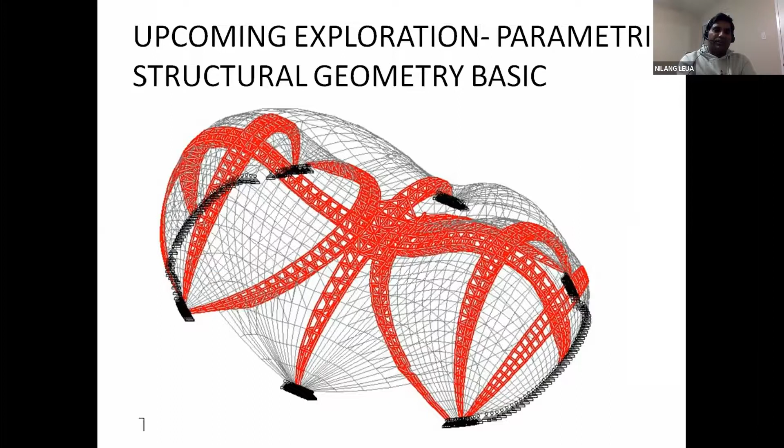Next slide, please. This is all about my presentation. I hope it adds value to society, and I may also get feedback from you. Thank you.

I think, Nilang, a lot of effort has been put into the project. A lot of ifs and buts were discussed. It seems a rigorous process was followed while the project was in progress. So if anybody has any queries, Nilang can respond to them.

Nilang, the presentation was wonderful. It was a very interesting thing. I was curious to know what kind of bamboo you would be using in your project. Are you specific to one kind, or will you use multiple kinds of bamboo? Presently, we are using bamboo from Assam, and it is also available from Goa. But most of the bamboo we use is from Assam, and we get the information from the vendor. They are experts in selection of the material. And all the bamboos are tested and dried very well.